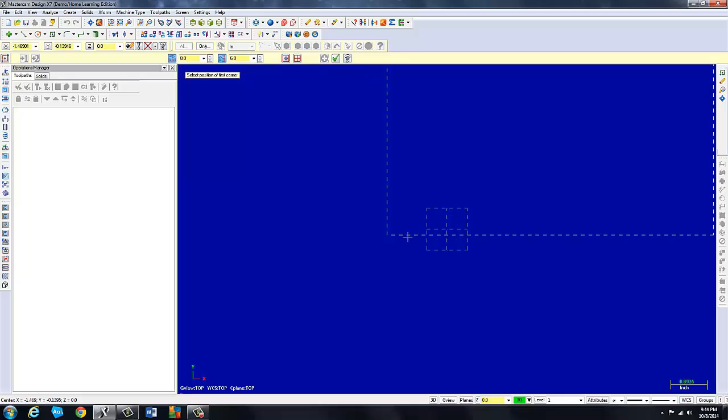Just go to create rectangle right here. Looking at my print, it is 8 by 6, and I'm going to place it to anchor it to the center. And there's my stock box. Now I'll go to that, check out of there, go to that circle center point that I was speaking of on the far right.

It's got a radius of 1 and the location is X 2.625, comma, Y is 0, enter, and there's our first circle center point.

I'm not going to check out of this operation. I'm going to apply it because I see 2 more circles I can use. The next one is part the way up. It's the 0.5 radius. It's a female radius and it sits at X 2.5 and Y 1.845.

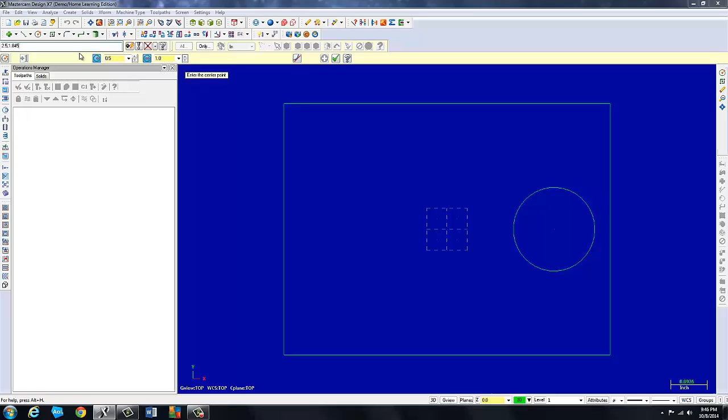So I put my radius of 0.5 in, go to my fast point. X is 2.5, comma, Y is 1.845, enter, and there's that small female radius. I'm going to apply it.

I'm going to go for my third circle center point. It's actually the circle that sits at the top of the part, although it's dimensioned at the bottom of the part because this part is symmetrical and we're going to just mirror image it. So taking dimensions from the bottom, but placing it on the top, I've got a radius of 1.

I have an X location, go to fast point, of 0, comma, and a Y location of 1.675. Enter. And there's the circle that's going to create the top of my part. Check out of that operation. There are 2 lines as well.

Like I said, we're going to take the low-hanging fruit first. I have a vertical line and a horizontal line. They're both dimensioned at 2 inches off of the origin.

This circle right here has a radius of 0.5 inches and it's also placed at 2.5 inches. So the tangent point here will be at 2 inches from the origin. I could analyze and check the distance if I'd like.

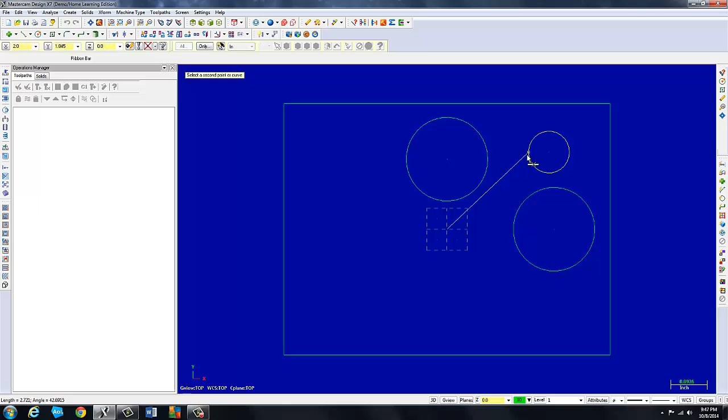Select the point or curve. I'm going to pick the origin and then I'm going to pick this tangent point here. Use your snap and it's going to tell me that it has an X distance of 2 inches. So that's a way to check yourself and make sure your math's right if you choose to use that. It doesn't count the angle, it's just counting the distance in the x-axis.

So I'm going to create a line endpoint, tangent, which is already active. I'm going to tangent right off of this snap point here, and then activate my vertical and just place it up here a little bit.

And I'm going to check out of that because I have to create my horizontal line, my little bitty tiny horizontal line that's actually shown with a dotted line on the other side of where we're working.

But the only way I can think to do it is to create a parallel line off of the rectangle stock box. So I'm going to go to parallel. I'm going to pick this line. And now it says give me a distance. If I do the math, 2 inches from origin gives me 1 inch off of that line. So at 1 inch, I'm going to pick this side. And there's my parallel line.

I had to do all of that just to create that little horizontal line that is so valuable to our contour. There's a couple other parallel lines I'm going to need down the road, so before I check out of this operation, I'm going to apply that and put those in as well. They're basically one going straight up the middle and straight across the middle so that I can use them for trimming these circles out.

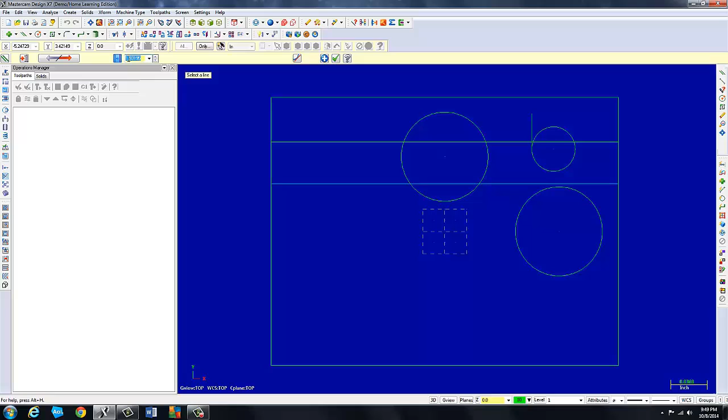So I'm prompted to select a line. Select this line, I want to go to this side, and I need to put an amount in. Off of that line, the origin is 3, and it'll put it right there. I need to apply that one.

Pick this line. You don't have to pick these in the same order, obviously. Just follow your prompt, indicate the offset direction, and it's that way. So I put the distance in wherever I feel like it, but I need those 2 lines for now, and I will trim them out later, or actually delete them later.

After I trim, now we need to put in our tangent arcs because we have good geometry with which to blend and create a contour. So I'm going to go create, arc, tangent, make sure that my 2 entities is activated. I have a radius of 4. I'm picking that one on the far right next to the 1. It blends with the 1 - it's very, very subtle. Enter.

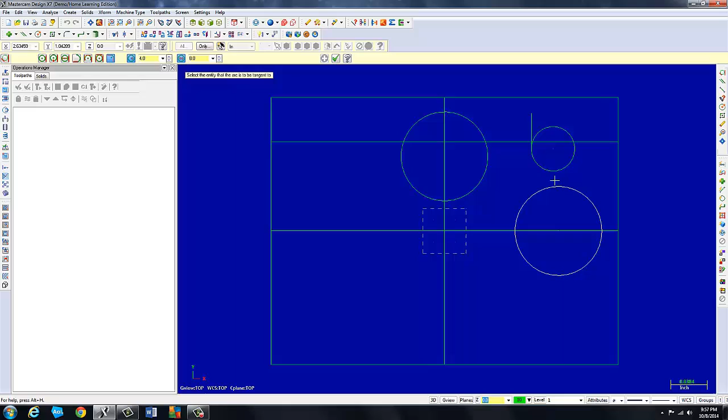And now I'm prompted to pick the entities, and those are all the variety we have to pick from. If you look at your picture, this is the one we want - it's not concave, it is convex, and that's the radius we need. I'm going to apply that and do another one.

I've got a radius 3 up here, so we'll change this dimension to 3. Enter. Select entity - this one comes off of this circle and it blends with the horizontal line. Looking at your picture, this is the one that we need. Basically, you just pick the one that you need.

Check out of that command. First thing I'm going to do is delete this horizontal line now. Now would be a really good time to do some trimming. Get my scissors out, I'm going to use trim divide. It works really good on circles.

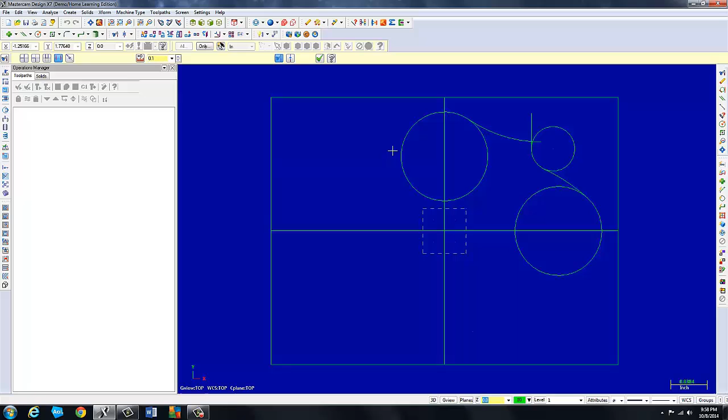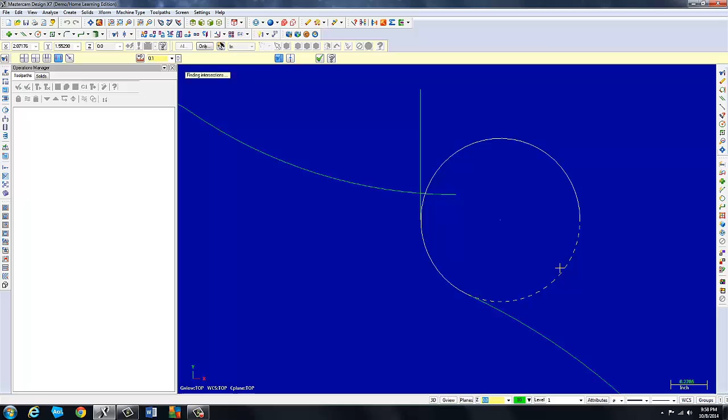For example, I can remove this half and this, remove all of these because we're going to X-form mirror this contour once we get it. I'm going to zoom up on this and trim this out, and that one.

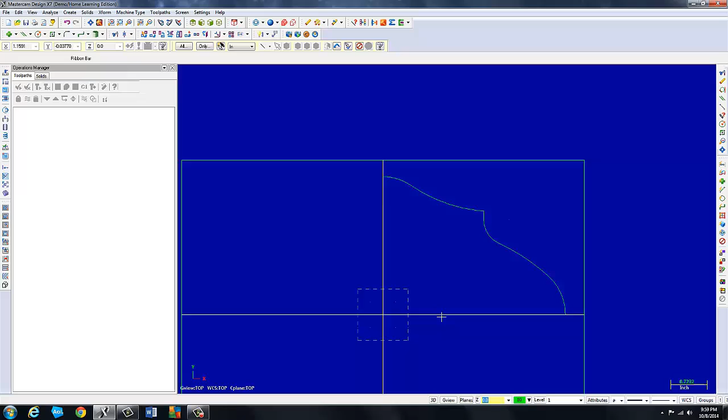And that, and there we have it. We actually remove that tangent point with the horizontal line - it technically was out here somewhere, that's why the drawing's so obscure. Check out of that command, select these 2 temporary construction lines and hit your delete button, or you can use your eraser up there. And now we are ready to start copying this.

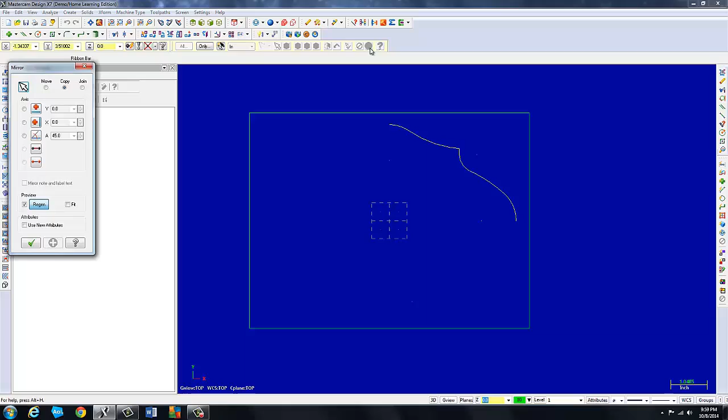X-form, mirror, slide a box around that and click it. We are done selecting. We are going to copy this about this axis right here, and with 0 movement. In other words, if I would put some value in here, there would be a gap between the two sections. I'm going to accept that and stay in the command.

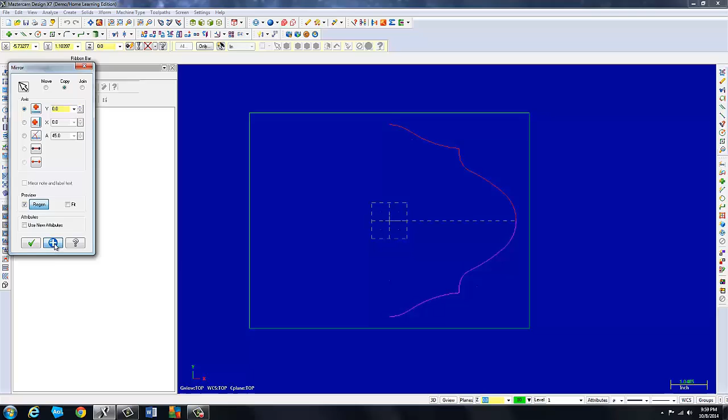I'm going to make another selection as I'm prompted. Slide a box around all of that, end selection. So we're going to rotate about basically the y-axis, and that looks perfect. So now we can check out of that command.

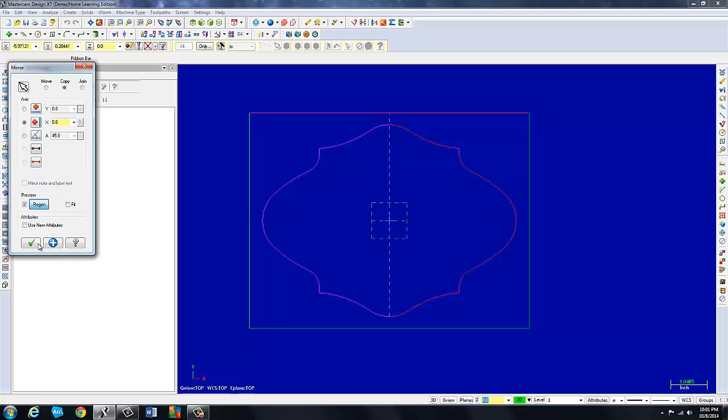I can clear colors. I think it would be a good practice right now to join all these entities, see how they're broken, and we can make it joined into one good chain. Technically it is a chain, but I just want to join them just to alleviate problems down the road. So you can do edit, join entities. This comes in handy for a lot of things, so I'll just use it here to show you.

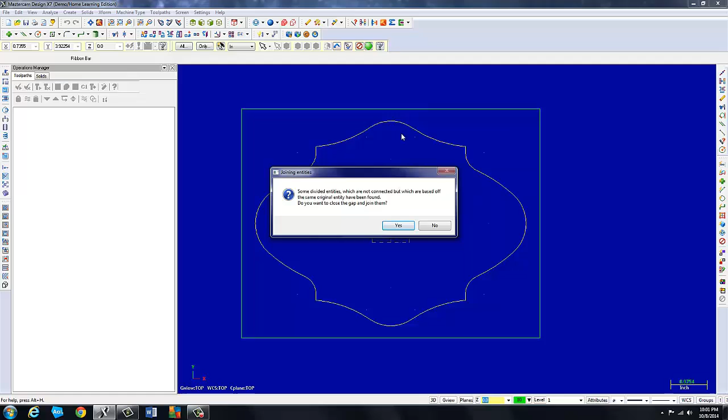Slide a box around all of our entities here. Click end selection, and now it's saying some divided entities which are not connected but which are based off the same original entity have been found. Do you want to close the gap and join them? Say no to that, otherwise it's going to try to join like this vertical line and this one, and it'll draw a bridge across there, and we don't want that.

So now I'm joined and I just feel better. So something I could show you just like I showed you analyze.

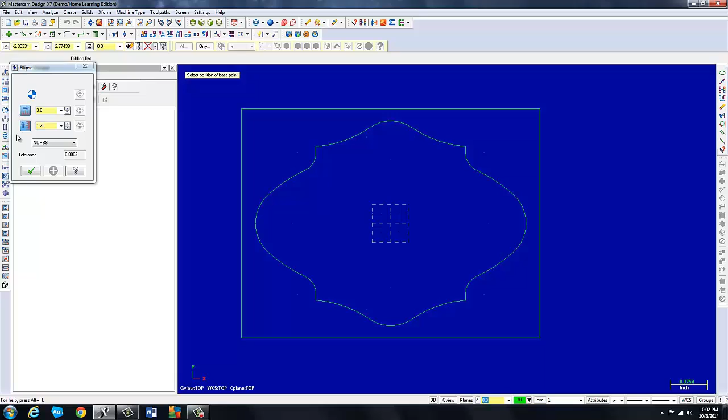So at this point we can build our ellipses. Create ellipse. Go to our drawing - we have a width of 3 and a height of 1.75. Enter, and now it's saying select a base point. I'm going to pick it right there. Apply that. Let's do the next ellipse.

It is 2.75 by 1.5. Enter and anchor that to the middle, and there we have our ellipses. So we got through that geometry okay.

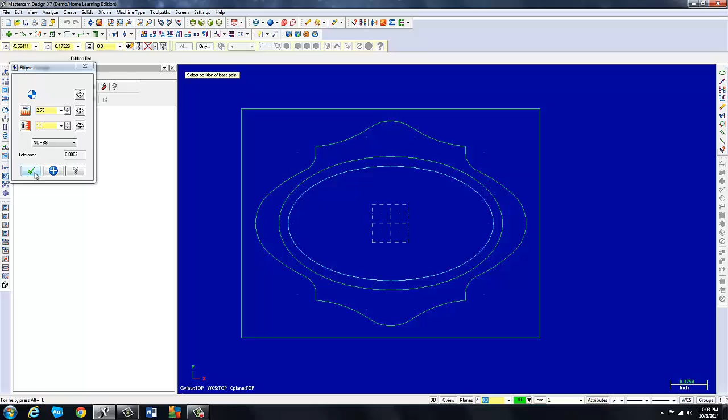At this point we just check out of here and go create our letters. So create letters. We need 101 for our verbiage, and we need Times New Roman, italic, okay. Our print calls for a height of 0.75 on these. It didn't give us a spacing, but it looks to me like it's about 1/4 of an inch.

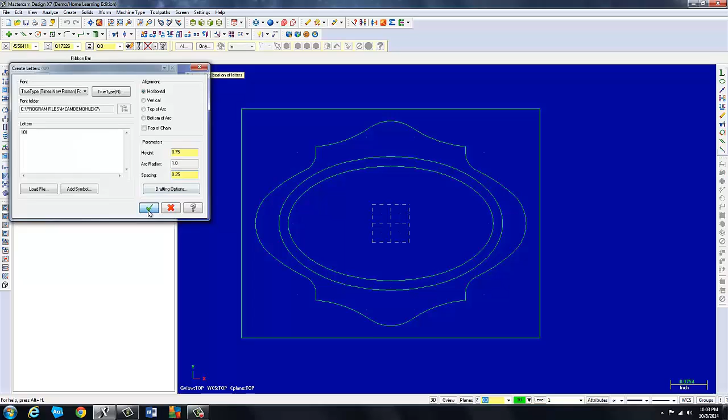So I'm going to check out of that and just place this over here. Now before I can put it in the part, I need to create a bounding box around it. And what that is, it's saying if you have a part, or say you buy a product and it's really randomly shaped and they want to give you the overall dimensions of every little tentacle and everything that's sticking off of it, that's what a bounding box does. And that way it can calculate the center of the entire odd shape, and you can place it in the middle of your part that way.

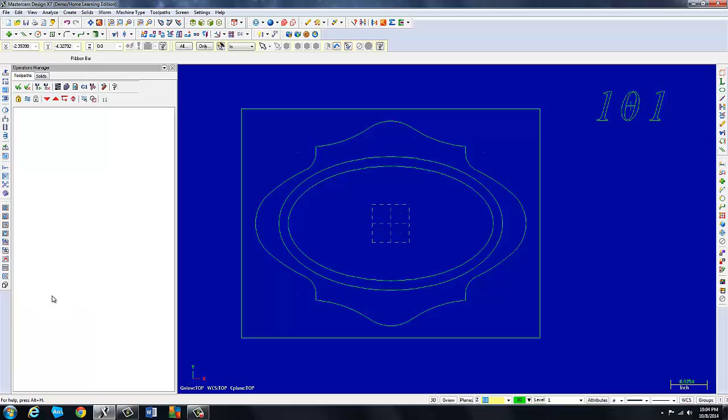So we go to Create, Bounding Box. Right now it's doing that because we have all entities. We need to uncheck that. Now it says select the entities. I'm going to slide a box over that and end my selection. I'm going to take lines and arcs off, and I'm just going to keep center point in there. You see it went in. So I'll check that. Now I can move it because I have that center point, and that's a true center point.

Okay, so to move it, I want to go to Xform, Translate, select entities to translate. I'm going to put a box around it. I'm not going to use the change colors and quick mask means of selection that you learned in the tutorial. That was just really to show you how to use it. End selection, select the point to translate from, this point, select a point to translate to. I don't have one I can pick, but I certainly can enter some coordinates here.

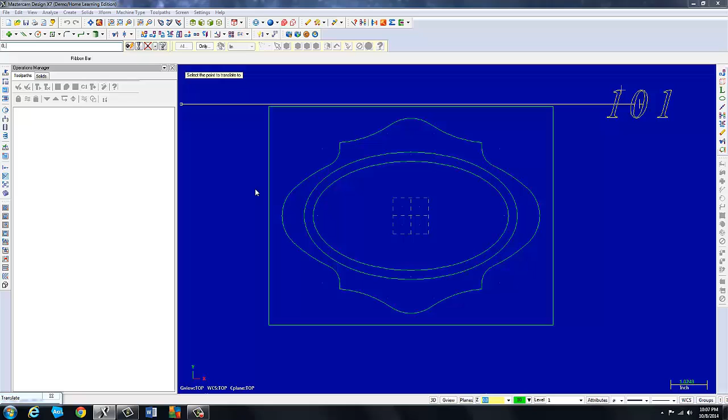And if I go to the print, my x is 0, comma, and my y is 0.75. Enter, and there it placed it. So I'll check out of that. We had to create this geometry separately because it's different sizes. So we go Create, Letters. This time it's Mastercam. Obviously it's still horizontally aligned. We have our Times New Roman italic 10. Our height is 0.5 for these Mastercam letters, and our spacing is 0.01 per the drawing upper left corner. That all looks good. Now it's enter a starting location for the letters.

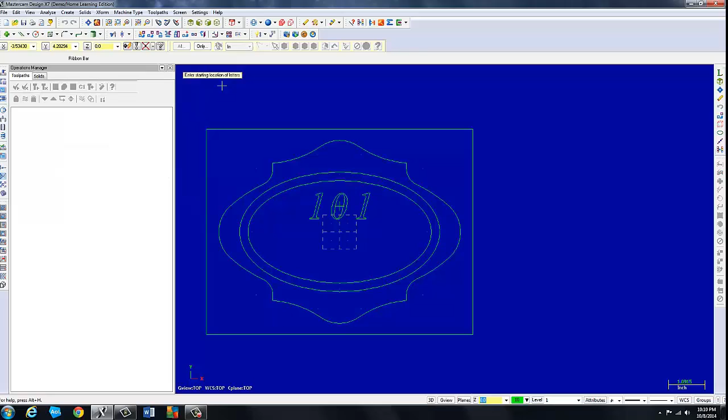Basically I'm just placing it, and that looks good. Now we need to put the bounding box around it. Create bounding box. Select entities. I'm just going to box them in instead of using the colors and the quick mask. End selection. And I want a center point. So we just check out of that. Now I've got that center point.

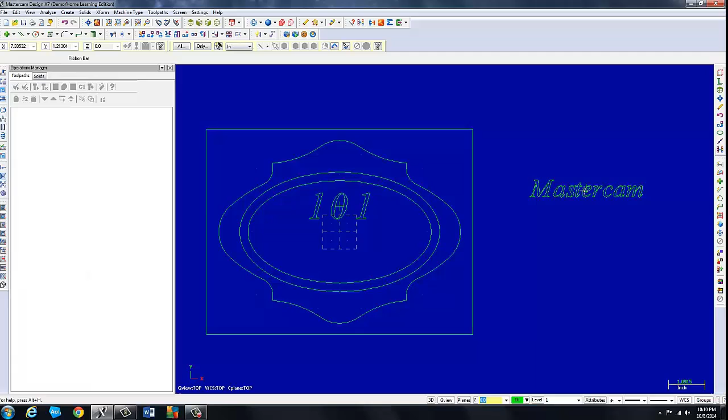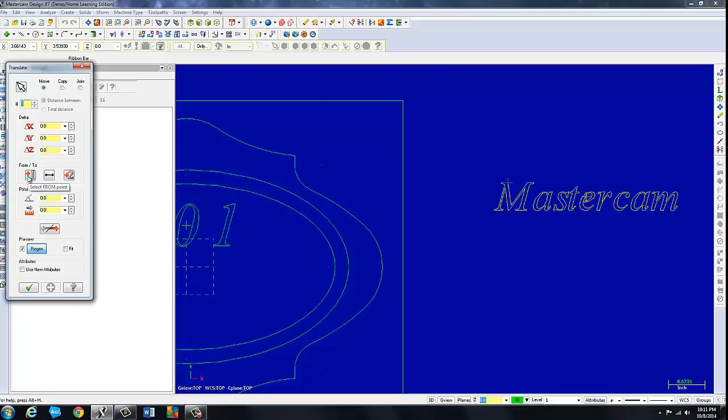So now I can go to Xform, Translate, select entities to translate. I need to box it again. End selection. I want to pick from the point within that box. That's why I need to box it all. If you try to just pick the point, it'll just take the point. There's the point. Now it says select the point to translate to.

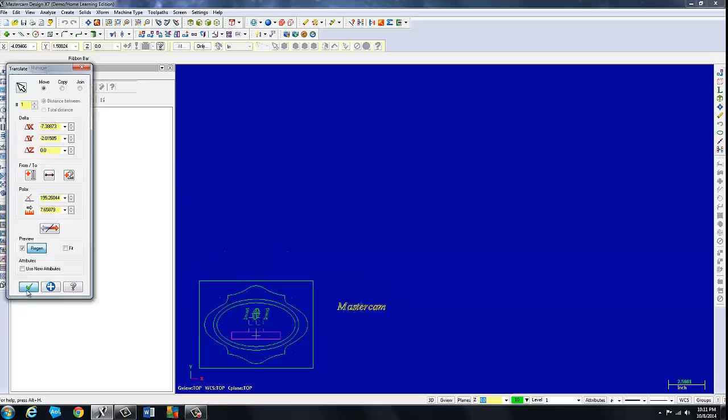Go to my fast point. Again, x is 0, comma, y is negative 0.75. Enter. And it looks like it's going. If I check the box, it'll be there. I'm going to fit and clear colors. And I believe that's all the 2D geometry we need for this part. The depths will be handled in the linking parameters of the cutting operations, the toolpath. So we can start setting up a machine and some stock.

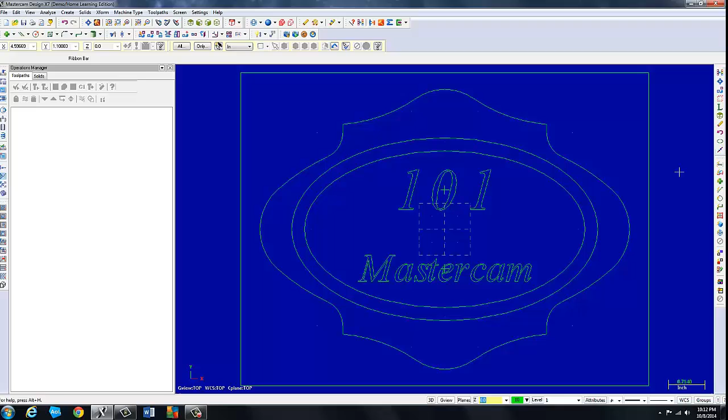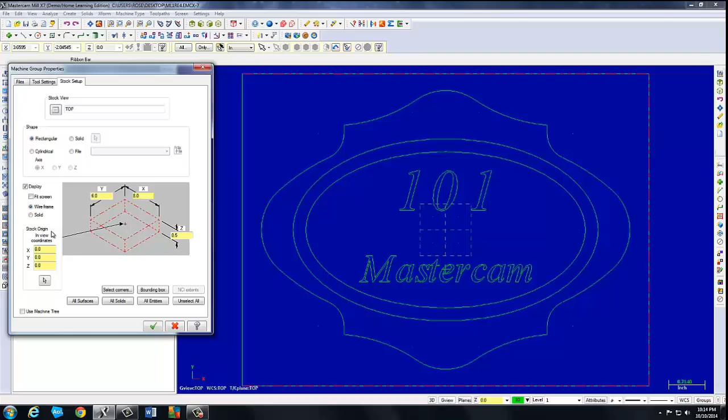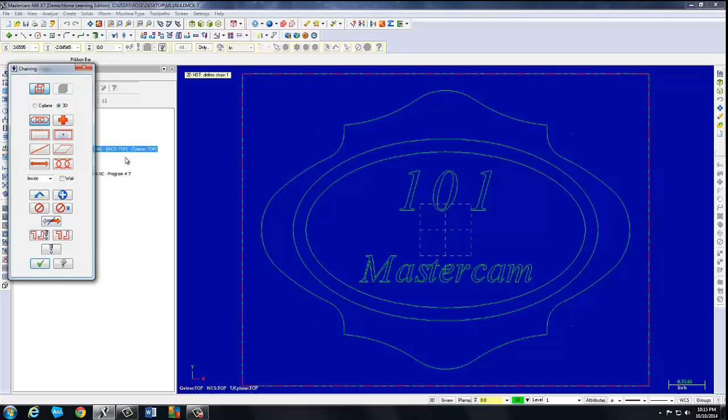Okay, so I've got my default mill selected. Tool settings are the same as usual. Stock setup, rectangular, Y6, X8, Z 0.5. The origin is in the center of the part, and the coordinates for that origin are all zeros. We'll keep that. Now I'm instructed on page 343 to create a 2D high-speed core mill toolpath. Select that name. I'd like you to put your name in all of your file names if you could.

Okay, now we're instructed to define chain 1. I'll pick that chain, reverse it to clockwise. Define chain 2. That will be the contour of the part. I'm going to reverse it to clockwise. And we are complete. That does make one single region, and we'll keep that. Toolpath type is the core mill. The tool is the 1-inch end mill.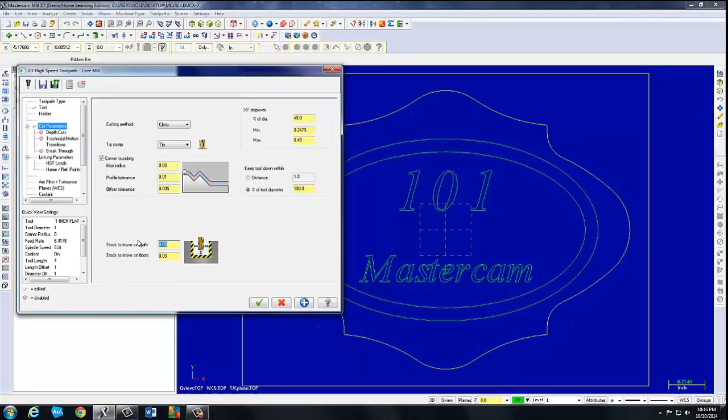We're going to machine the outside contour. This will show up as verbiage in your program. It's very important when you're sifting through the program. We're not messing with holders for a while. Cut parameters, we are instructed to enable corner rounding, and I don't want to leave any stock on walls or floors, so I put zeros in there. Everything else looks fine. We're asked to enable depth cuts,

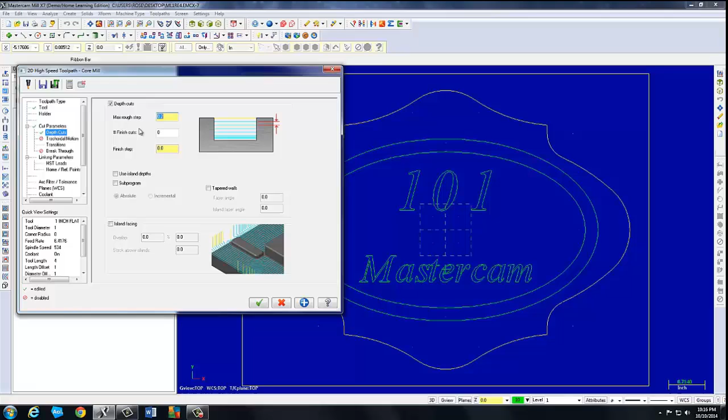so pick something. We have to go a 1/2 inch through the part, so I'll pick 0.2. That should leave me 3 cuts. Actually, you should be able to cut it 1/2 inch deep with a 1-inch cutter. It's usually half the diameter that you can cut depth-wise or on the side. But they want us to use depth cuts, so I'm using it.

Transitions, we are asked to just pick an entry method. Helix at the 250 thousandths radius is perfectly fine. We will use breakthrough here because we are going to go all the way through that rectangular stock. I'll go past it 50 thousandths. I'm sorry.

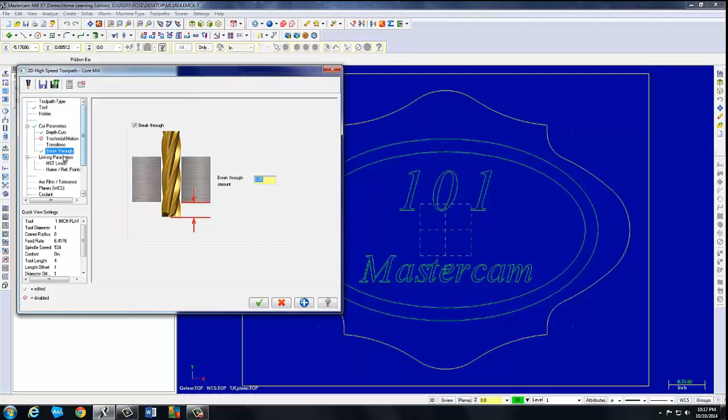And then our linking parameters. Our clearance is standard 2 inches to take care of any types of clamps or holding devices we may have down. Retract is when it comes off the part. Feed plane is where we start to cut. That's the one item you should use incremental for because it's 100 thousandths from wherever you're going to start cutting. All the rest should be absolute.

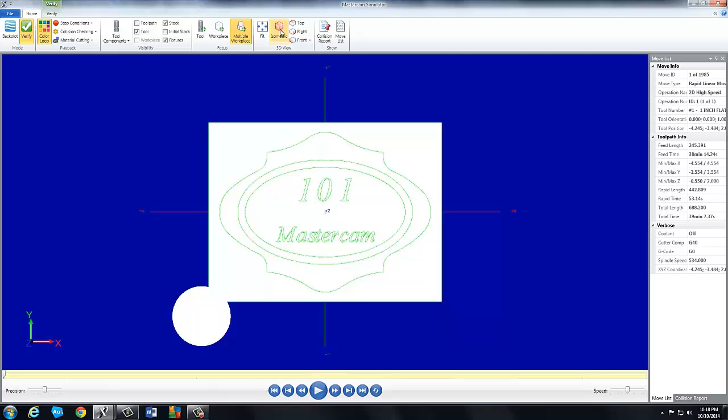Top of stock is 0. Depth is -0.5. The breakthrough will handle the rest. Technically absolute or incremental would work for depth if your top of stock is 0, but it's a good habit to stick with absolute in case you change the top of stock for some reason. So that looks good, and we'll take that. And we will verify very quickly. Isometric, fit. 1 layer, 2 layers, 3 layers. Looks good.

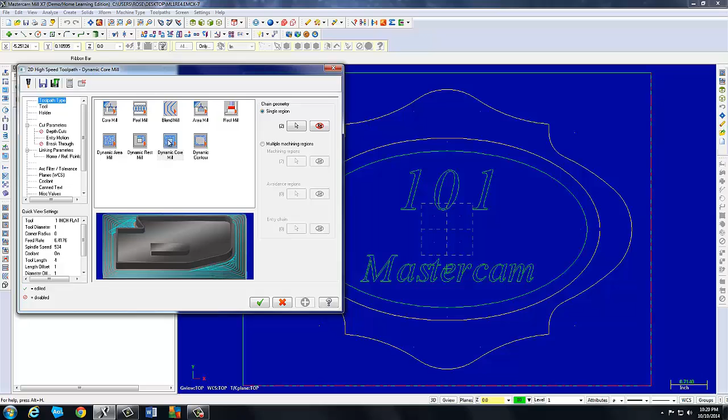Okay, next we are instructed to remove the material at the step using dynamic core mill. Toolpaths, 2D high speed, dynamic core. I'm instructed to define chain 1, which would be that chain, and chain 2 would be this chain. We're going to cut a step in that area. As you can see, they're both lit up, so we're good. Yes, it is a single region. Dynamic core mill. Tool is the 1 inch again. We're going to machine the step.

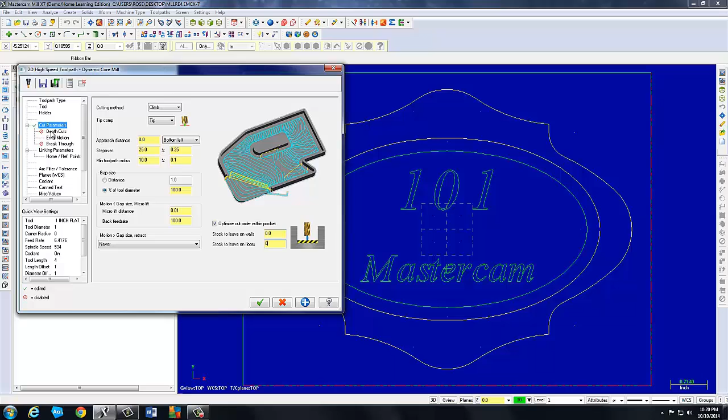Cut parameters. Basically, we don't want to leave any stock for any reason. Everything else looks pretty good. Depth cuts is already disabled. We won't be needing that. Entry motion, stick with the helix with the 250 thousandths radius. That's fine. Obviously no breakthrough. And our linking parameters are all the standards. And this step is -0.250.

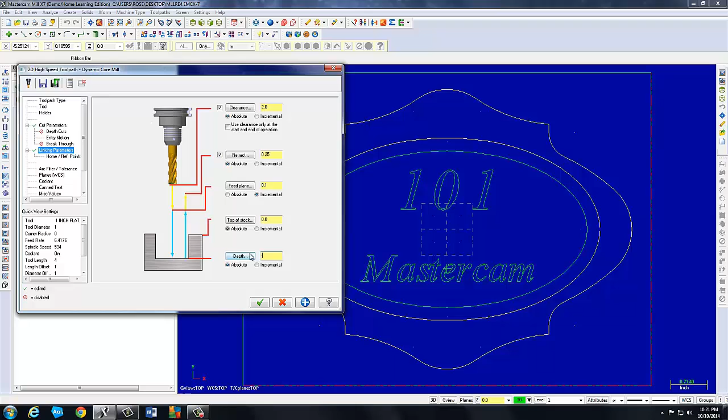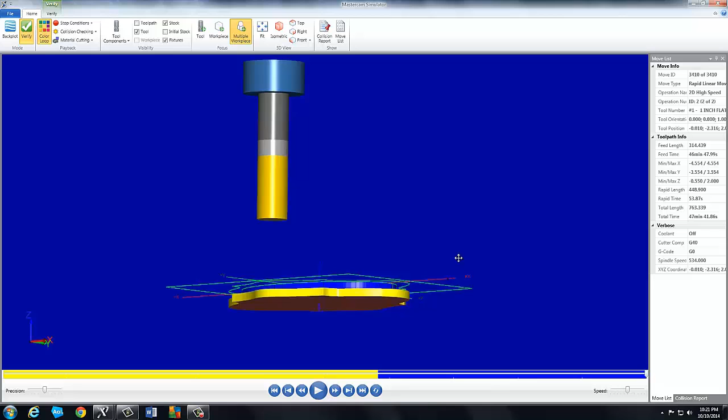We'll go ahead and select all and verify. See how it runs. It looks good, and I don't see any stock. Sometimes I'll forget to leave 0 stock, but I didn't that time, so we're good.

Now we're asked to pocket out the center. Go to toolpaths. Pocket. We're going to use the window this time, just like we did in tutorial 4, and capture the letters and the internal ellipse only. I'm right on the line there, but we'll find out. Now it says to sketch an approximate start point. Okay, I missed my ellipse because I got on it a little bit. If you don't encompass something completely, it won't be selected. So I'm going to escape out of that and retry it.

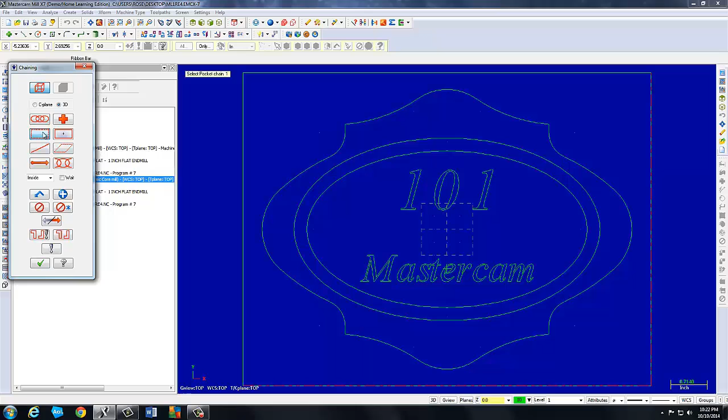Toolpath, pocket, window. Everything's inside now that I need, the internal ellipse and the letters. Sketch a start point, just click right there. Everything lit up well. We're ready to go with that. It's a pocket. The tool itself is a 1/4 inch flat end mill. I'm going to go to the library. Equal to 1/4. There it is. We'll pick it.

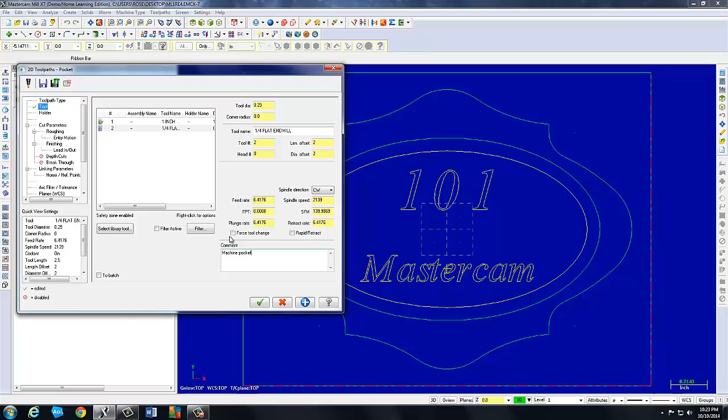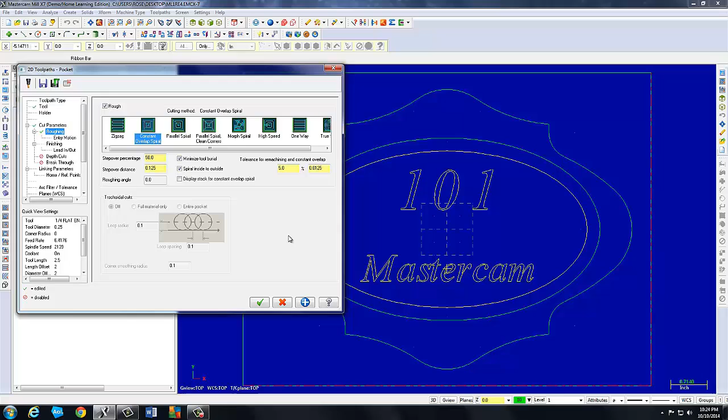Machine pocket. You can put anything you want in there, whatever is meaningful to you when you're looking at a bunch of G code and a program. We're not doing holders. Cut parameters. We need the standard pocket, leaving no material on walls or floors. In roughing, we're going to choose the constant overlap spiral per our instructions on page 343. The entry motion is helix. There's not going to be any finishing here because we're going to remachine it later, so we'll disable that. No depth cuts on this or breakthrough.

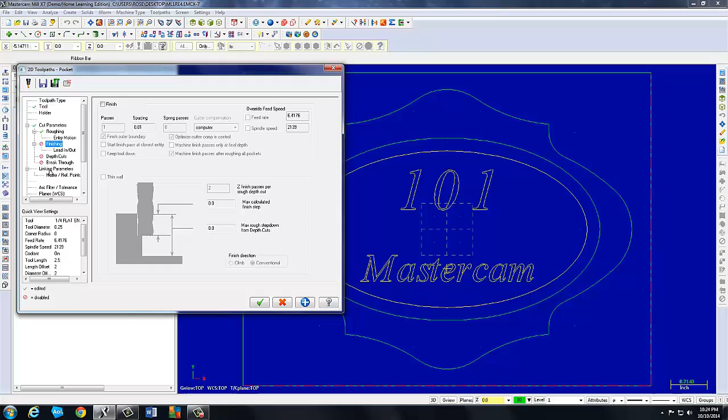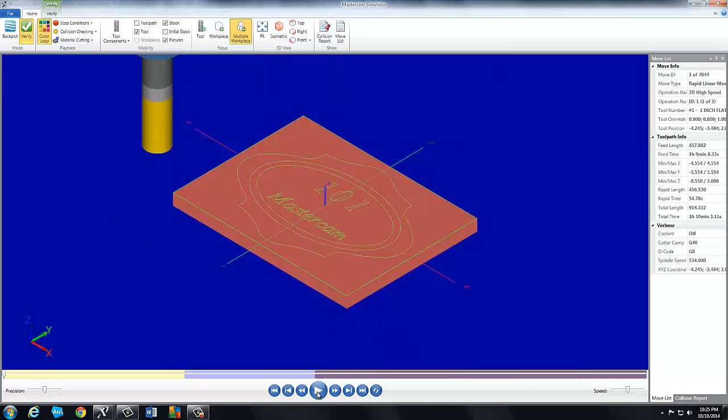Linking parameters. Our depth is negative 0.125. Looks good with the generation. Might as well run it. Isometric and fit. Very nice. So now all we have to do is remachine with the finer end mill and clean the rest of that up. But we didn't want to do the whole thing with a 1/16 inch end mill. It would take forever. So we hogged out as much as we could, and now we're going to finish it and pick out those corners.

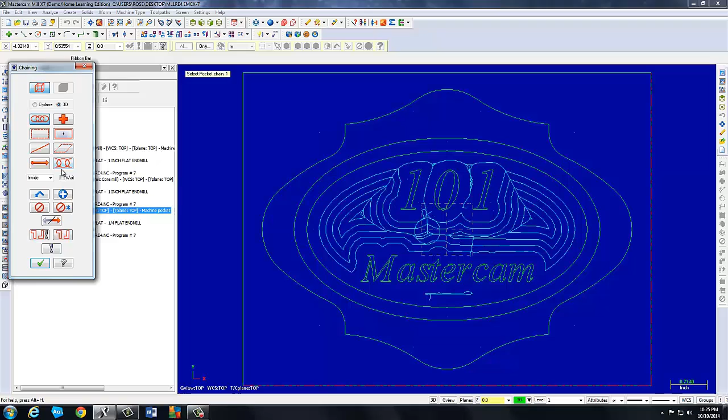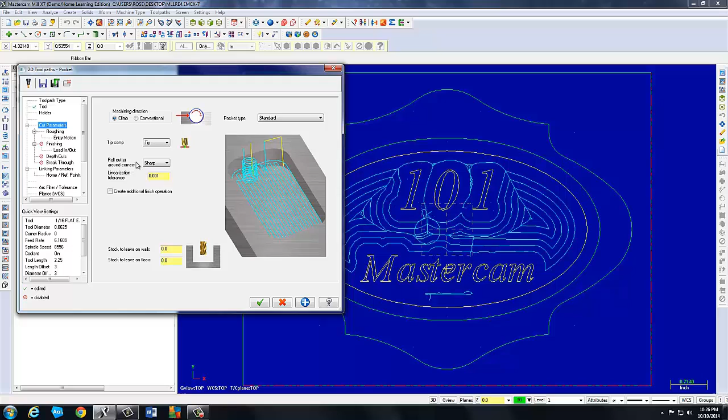So we go to toolpaths, pocket. We already selected everything from last time, so we can just use the last button. Say yes. It is a pocket. The tool is going to be a 1/16 of an inch flat end mill. I have to go to my library. 1/16. Enter. There it is. We'll pick it. I could say remachine or finish pocket. Cut parameters, we want to go to remachining for sure. There is no stock being left. This is the operation we want to remachine, the standard pocket.

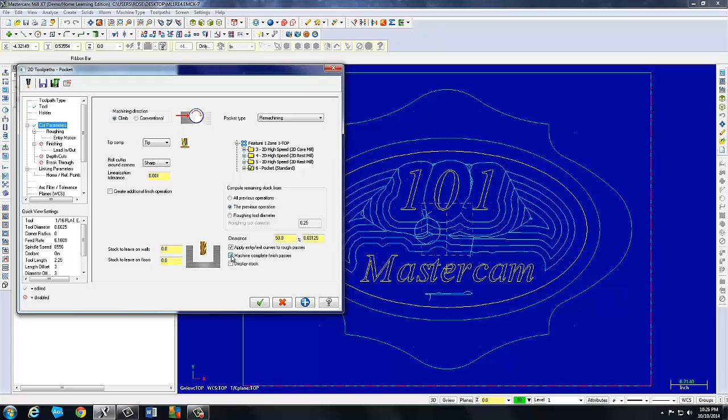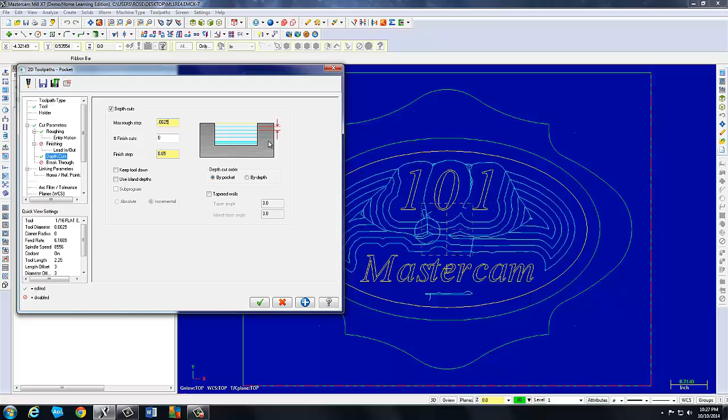We want to disable display stock, machine complete, finish passes. Step over percentage is 55 according to page 344. The entry motion is off for some reason. We're going to use depth cuts with a maximum rough step of 0.0625. There obviously is no breakthrough. Our linking parameters are the same all the way down, except that our depth is negative 0.125.

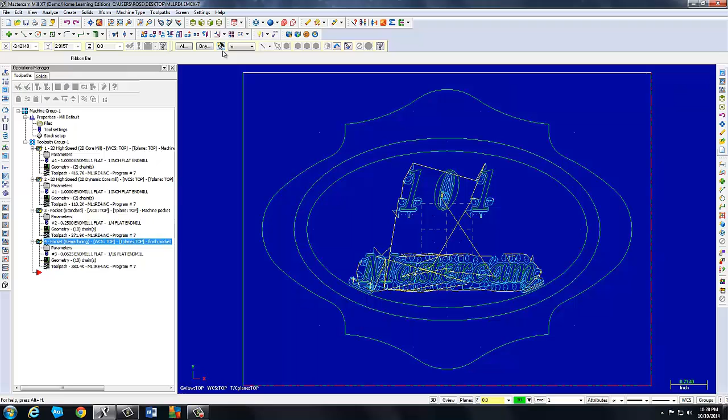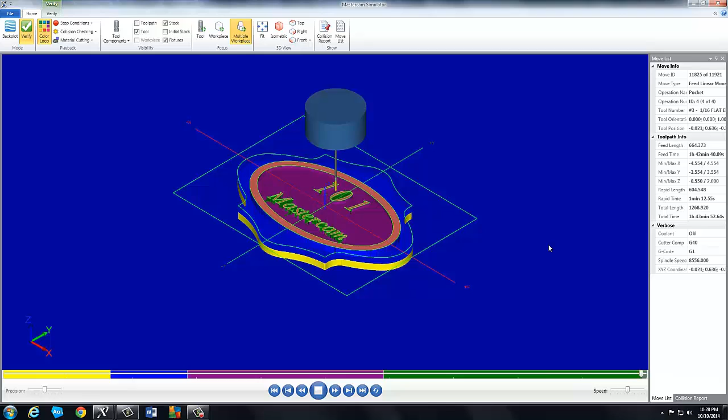Looks good when it generated. Let's go ahead and verify. Isometric, fit. And there's our remachining, picking out all the little stuff that the 1/4" end mill had left behind. I think that looks like a good part. I'm going to middle mouse and zoom up on it and take a little closer look. That's what you need to do. So good luck.